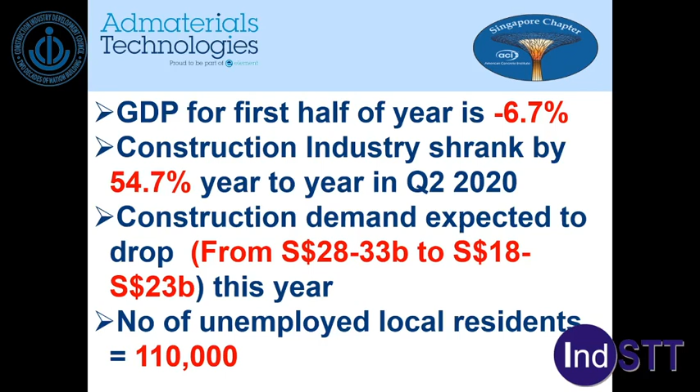Construction projects also faced disruption. We have more than 4,000 sites stopped during the circuit breaker period. Until now, some of the projects haven't started. The COVID-19 outbreak at the dormitories affected more than 300,000 foreign workers, who were locked down in the dormitory for more than 4 months.

The global supply chain was also disrupted, and cash flow became a problem. We have to comply with all these additional COVID compliance costs. So eventually, the cost of construction will rise.

But fortunately, the Singapore government gave the industry strong support. For example, they gave manpower cost support through the job support scheme from January 2020 to March 2021. The company will receive 75% to 35% salary subsidy from government, but only for local employees. For foreign workers, the levy was also waived 100% to 25% from June 2020 to December 2020.

Foreign workers' levy rebate of every month, from $750 to $90, we are giving from June 2020 to December 2020.

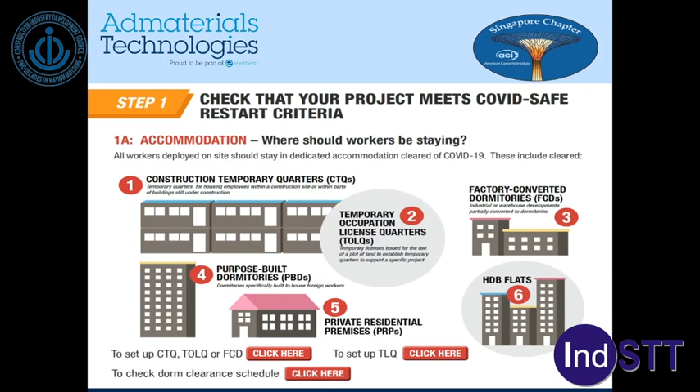First step, you have to check that your project meets the COVID-19 Safe Restart criteria. Basically, you have to first check your workers' accommodation - where should workers be staying. There are a few options, almost 6 options. For every option, you need to check whether the accommodation meets the government requirements.

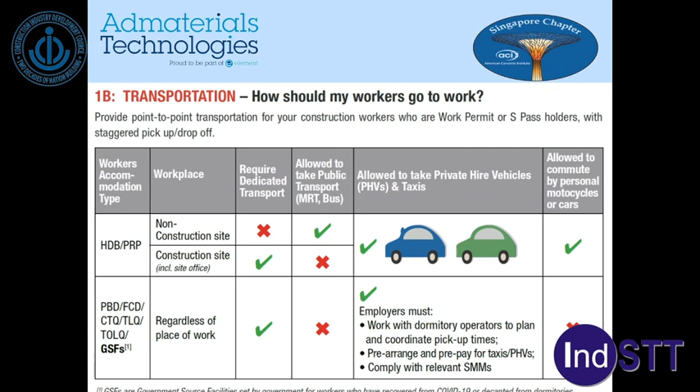Second, transportation - how can your workers come from the dormitory to the workplace? You need to arrange transportation. Mostly for construction sites, you have to arrange dedicated transport, because workers are not allowed to take public transport.

For the work site, you need to plan safe management measures. This means you need to appoint at least one safe management officer, and you may need some safe distancing officers, depending on the size of the workforce.

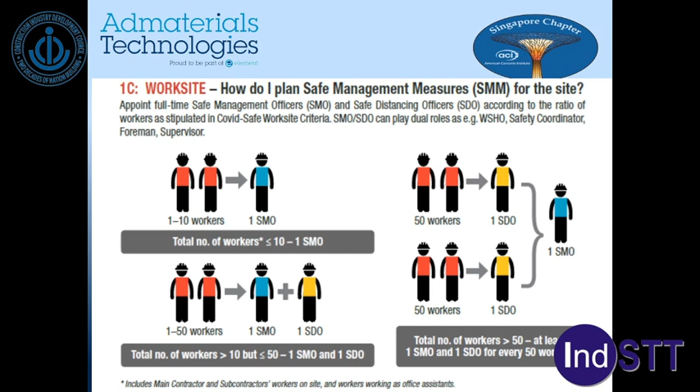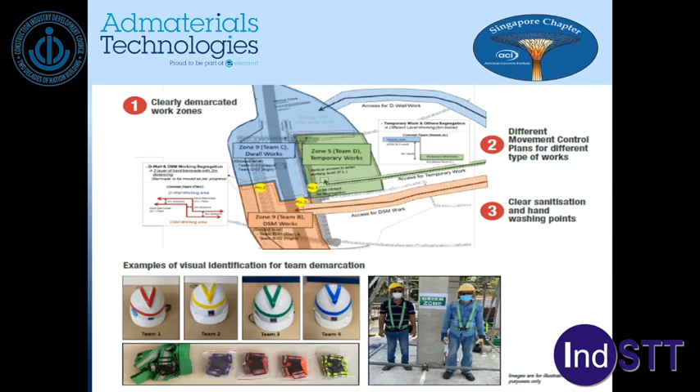For the construction site, you also have to clearly demarcate work zones. Workers cannot mingle between zones - you cannot go from one zone to another. There are different movement control plans for different types of work, so you cannot mix them together. You have to provide clear sanitization and hand washing points for all workers. You can see all workers have different helmets or clothes, so you can distinguish each group.

For the workers, they have to download 3 apps: TraceTogether, SG WorkPass, and Foreign Worker MOM Care. You have to check the apps to see whether the status is green. Only if it's green are they allowed to enter the construction site.

You also have to educate your workers on COVID-safe practices. You have to arrange work for accommodation - if there's any update, you have to inform MOM.

After that, you go to step 2: apply to BCA for restart of work. You can apply online, so it's very simple, very easy. The owner has to submit the application before work can start.

After obtaining BCA approval to start work, what should you do? You have to book swab tests for your workers. This swab test has to be done not just once, but every 2 weeks - you have to send your workers for testing.

Workers also cannot rest on the same day - they have to stagger their rest days. This means not all workers can rest on Sunday; they have to be distributed across weekdays - Monday, Tuesday, Wednesday, and so on.

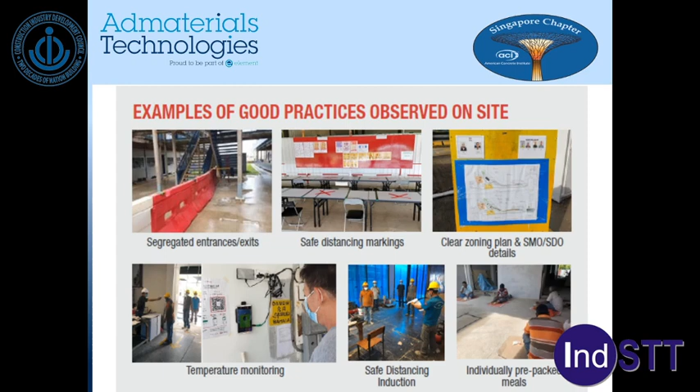So what is the new normal in construction? After construction work starts, you have to maintain safe work management, containment, site zone, and demarcation for work team purposes, for decongestion - safe living, safe transport, safe work, and safe rest. So contact tracing and isolation - you need to make sure of safe entry, contact tracing, swabbing, registration, isolation, SOP, etc.

Next, we have to use teleworking or telecommunication. Digitalization now is a trend for all industries, not only construction. So you also have to establish business continuity planning, or what we call building resilience. So listing start work SOP - basically you need to follow BCA's good practice guide.

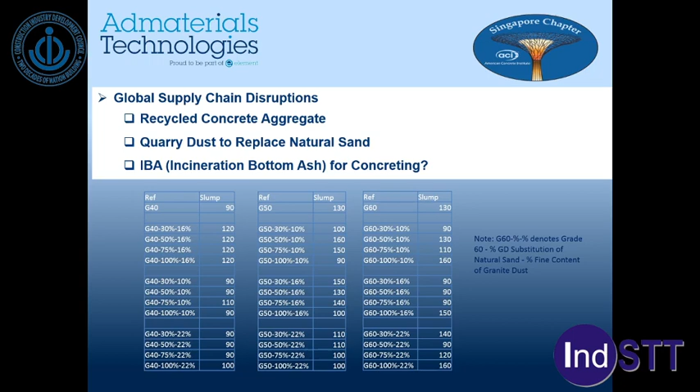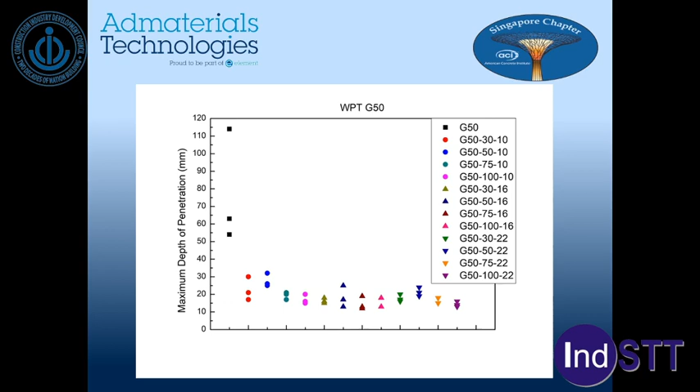This shows different fines content and different replacement levels. We can see that workability, meaning slump, is not much affected even if we use 100% replacement and fines content as high as 22%. So workability is still comparable to natural sand. Even for water permeability - for example for this grade 50 concrete - granite dust concrete is actually better than natural sand. Same for carbonation depth - natural sand and granite dust concrete, the granite dust concrete is better.

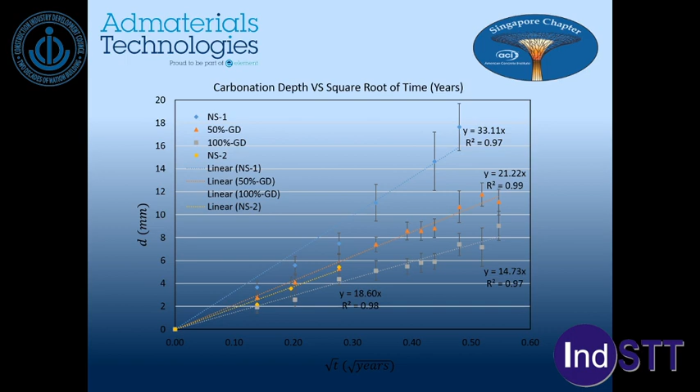This is part of our research results, which I just want to share with all of you.

Next is digitalization - artificial intelligence for ready-mix concrete. This AI tracks all movement of raw materials and products: the arrival of imported raw materials in Singapore, the transportation of these ingredients to silos, from silos to the plant where concrete is made, and the transportation of concrete to the work site - all this can be traced. This can also optimize the use of plants, trucks, manpower, and raw materials via collecting data and handling orders. Using this system, we can save at least 45% manpower.

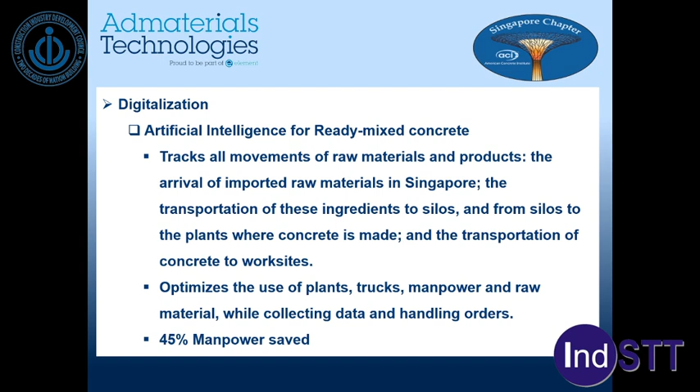Again, this is one of our leading ready-mix concrete suppliers, Pan United Concrete. They have already implemented this system and even signed an MOU with a South Korean company to help them set it up.

So that's innovation in concrete technology - smart concrete mixing systems control concrete consistency even as mixer trucks move from the batching plant to the project site, enabling fixes to the concrete mix to be made remotely. This reportedly improves the consistency of product quality, removing the need for quality assessors and product technicians to test each truck's output while on site.

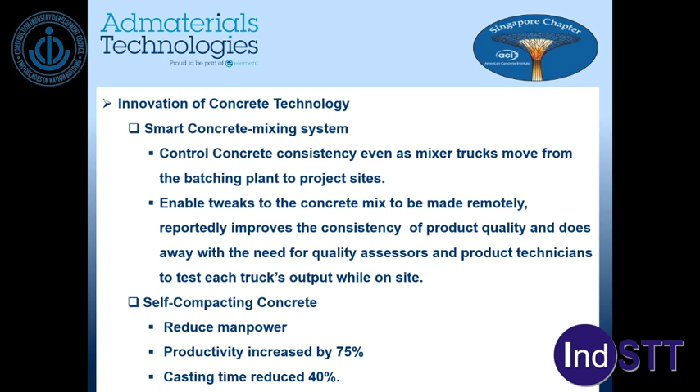Another innovation is self-compacting concrete - this can reduce manpower, productivity can increase by 75%, and casting time can reduce by 40%. This is from one of the papers again from Pan United. You can see that using innovation and high technology, you can actually save manpower and save costs.

So in conclusion, the number of COVID-19 cases in the community in Singapore has decreased from low single digits to none in the past weeks. But it is not a return to the pre-COVID status quo. It will entail new ways of working and living until the world has the virus under tight control. It is critical to adhere to safe work management measures, and digital transformation will help us stay ahead in the new normal.